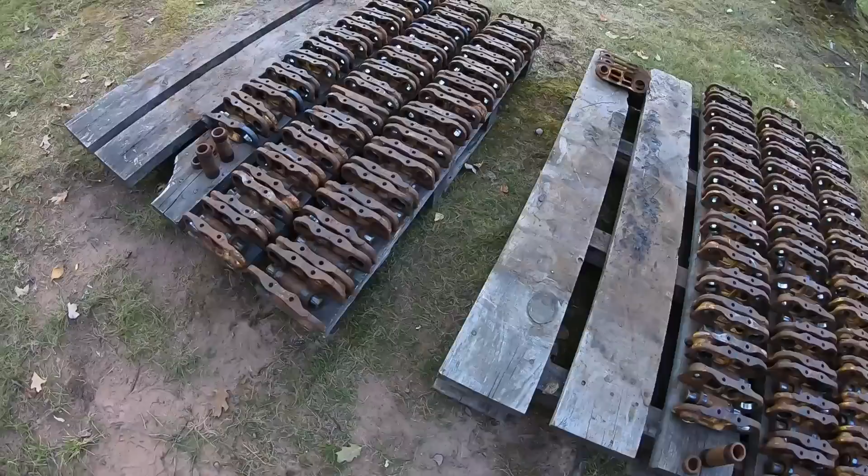That's right, we've got everything completely broken down for track links. And I have not gone through and assessed every one of these with a fine-tooth comb yet. I've got a small pile of links right there that are all bad, and another small pile of some links, a couple of nasty master pins, and some roached bushings, and that's another bad pile right there. But we need to go through all the rest of these and make sure we've got everything in good condition before we even start trying to put any of those back together.

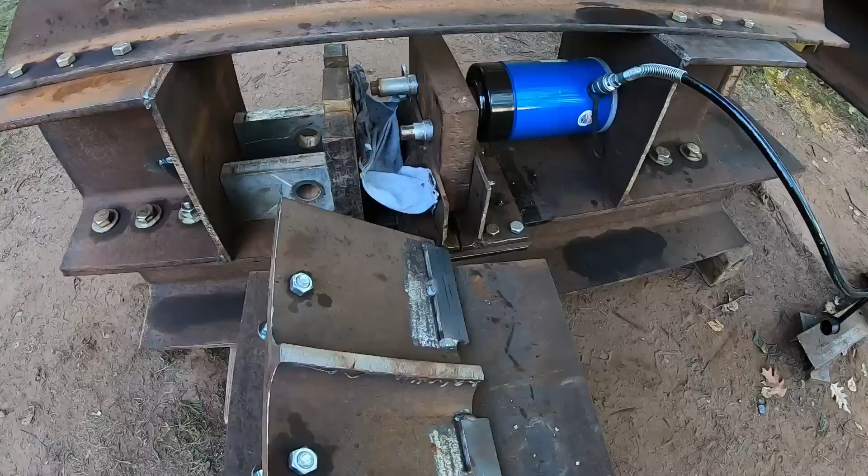And I wanted to give you an update on my thoughts regarding the track press. I've got roughly, I would say, 175, 180 cycles on it now, under pressure. And, well, I ended up using this track press for the majority of the disassembly of the remaining pins and bushings out of those single links because the 30-ton press frame pressed the pins just fine, but I could not get it to press the bushings.

And one interesting thing I found was all of the pins in the links all pressed easier than the bushings. The pins routinely let go around 20 tons and then drifted out from 12 to 15 after that. The bushings mostly wanted to let go at 30, some 35 tons, and it took about 20 tons to drift them the rest of the way out of their bores. So the bushings definitely press harder than the pins, and the 30-ton ram was at its limit even trying to move a bushing.

So what I ended up doing was taking all of those links that still had an individual link with a pin and a bushing left in it, I flipped them around and then just set them back in here and used the 50-ton ram to finish pressing those the rest of the way apart.

So like I said before, the reason why I wanted to try and press the remaining pins and bushings one at a time in the 30-ton press was to keep the cycles off the track press machine because, yeah, it's got a lot of power, a lot of strength, but I don't know what its lifespan is going to be. So I was trying to conserve that power and strength for when I really needed it for disengaging that first initial link and then pressing that link back on to reform a cohesive chain of track. But I had to fall back on the main press because the smaller 30-ton just wouldn't do it.

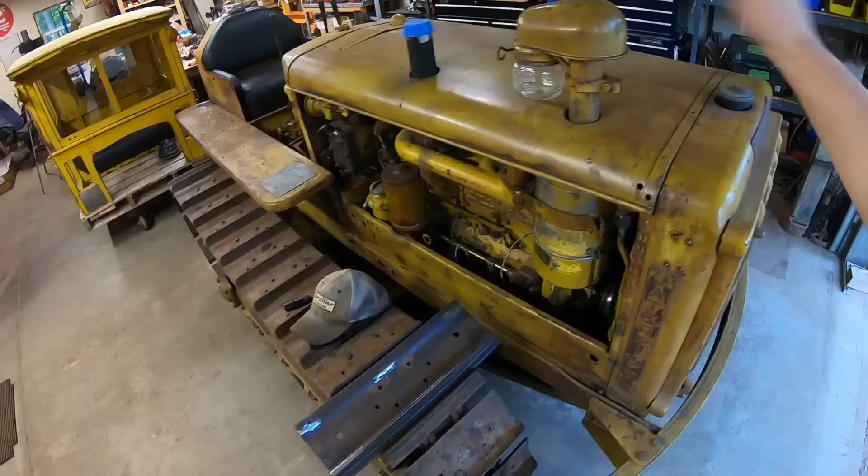All right, so another common question that came up in the comment section under the last episode was, why am I going through all the trouble of pressing out pins and bushings to turn them 180 degrees to renew the wear surfaces and press them back in when I could potentially just take the chain from one side, flip it around, put it on the other side, do the same with the one from that side. You would reverse the direction of the chains. You would also reverse the thrust that is being applied to the pins and the bushings, and that way you wouldn't have to take them out and turn them 180 and you'd be accomplishing the same thing, right?

Well, I made an episode talking about this very thing several months ago, and that little link that just popped up somewhere on your screen, if you haven't already watched that episode, I highly suggest you go back and look at it because it explains in depth the geometry of track links on crawler tractors and how it is very important to only run them in the proper orientation or the proper direction.

You can fit a track chain on in reverse, but it throws the geometry off. It is going to interfere with the sprocket picking up a bushing. That bushing is then going to have to rotate under pressure on the sprocket teeth as it picks it up and brings it around.

It's not a good idea at all to reverse track chains. That's why it's been industry standard maintenance routine to just press track pins out and press bushings out when they've reached a certain amount of wear, turn them 180 in the links, press them back in, because reversing those links is a very bad idea.

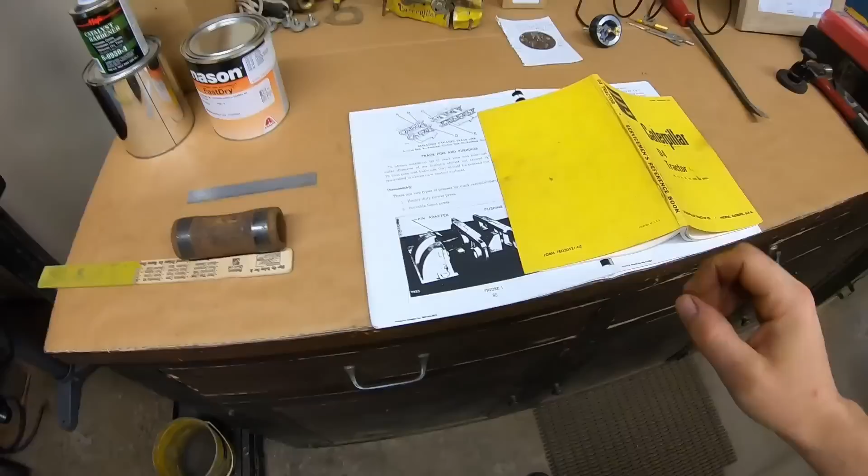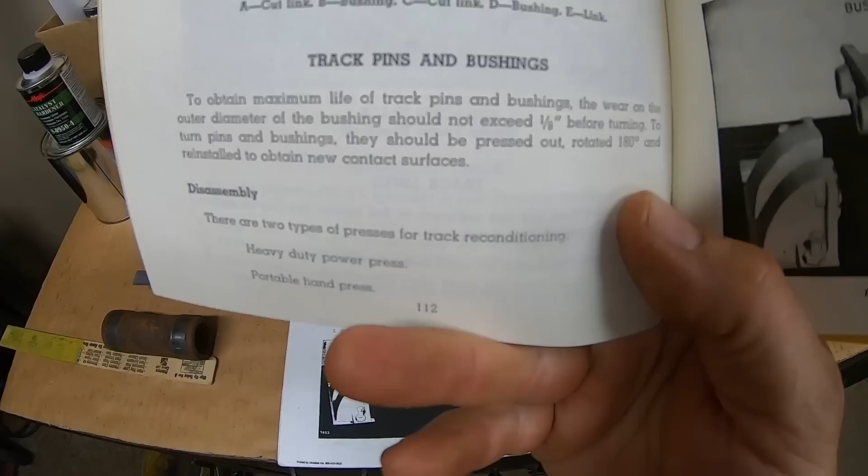Another question was, is this some kind of farmer hack or just something we're doing, like a backwoods bush engineering kind of thing to extend track life? No, this has actually been in practice since they've been building these tractors. I'll refer you over to the service manuals. Here's the D2 manual, here's the D4 manual, but it states right here, to obtain maximum life of track pins and bushings, the wear on the outer diameter of the bushing should not exceed 1/8 of an inch before turning. To turn pins and bushings, they should be pressed out, rotated 180 degrees, and reinstalled to obtain new contact surfaces.

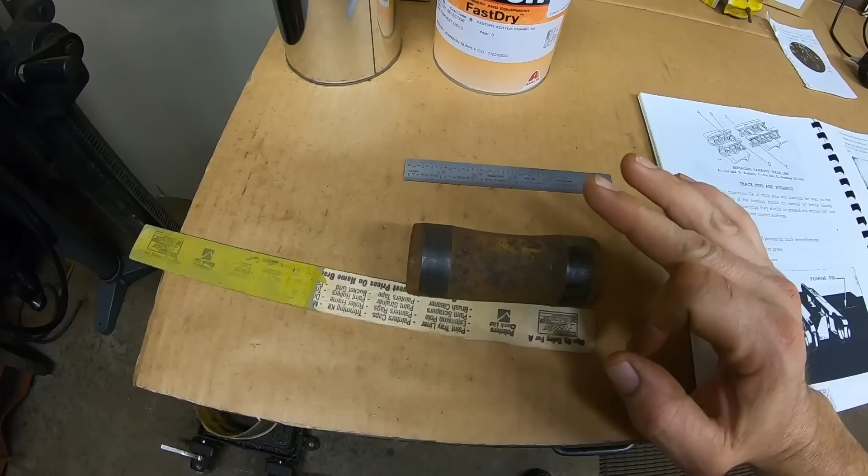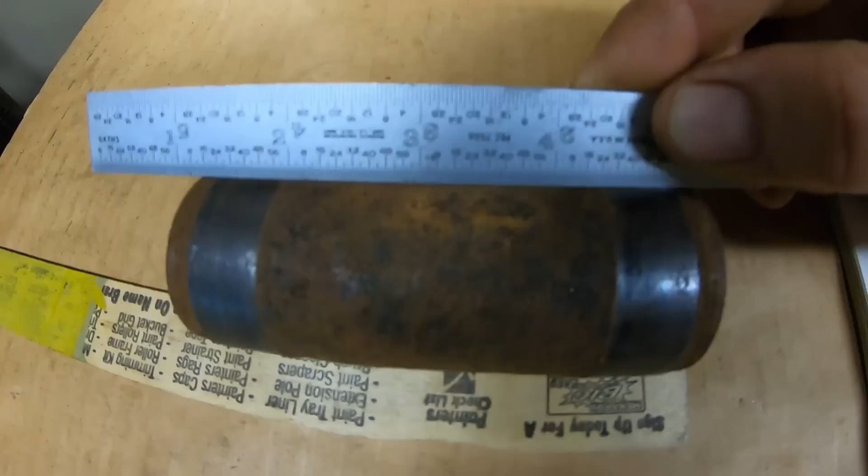That external wear they were talking about, I did not touch upon last time because the bushings from the tracks that I'm working on now do not really have external wear at all. This one does, and that's where that sprocket would always pick up the bushing. So if I put the straight edge up to it, I think you can see right there, we've got quite a gap. That's that external wear that they're talking about, and that's from the sprocket routinely just picking that up in the same spot all the time and pulling it on around.

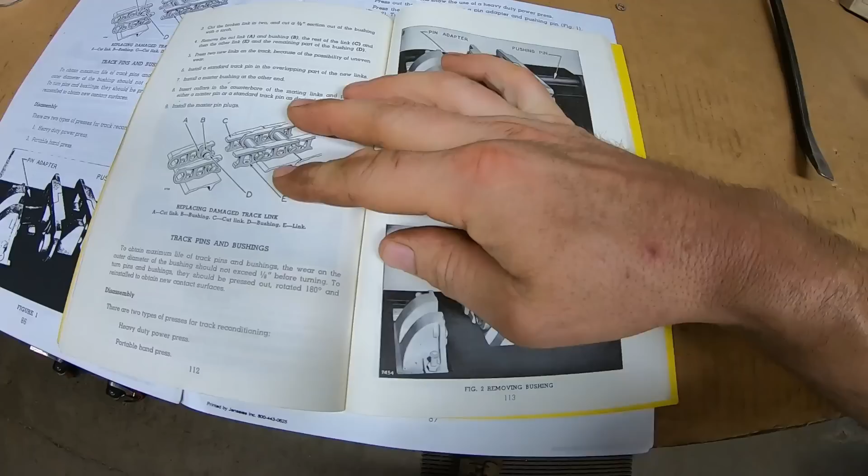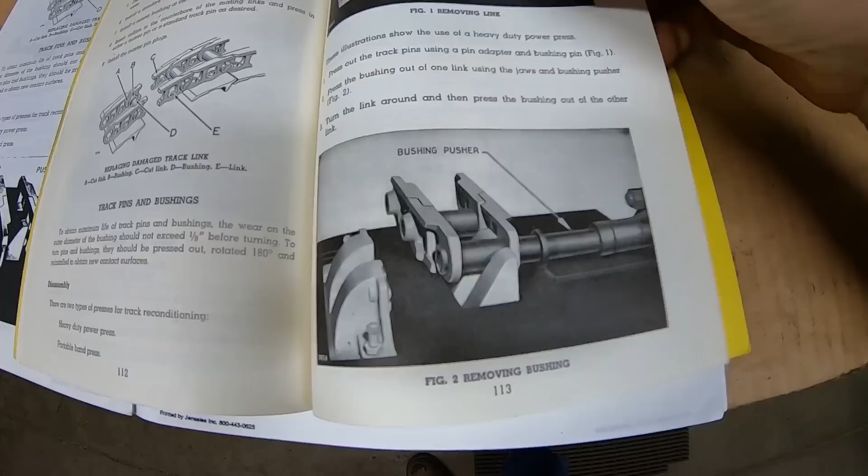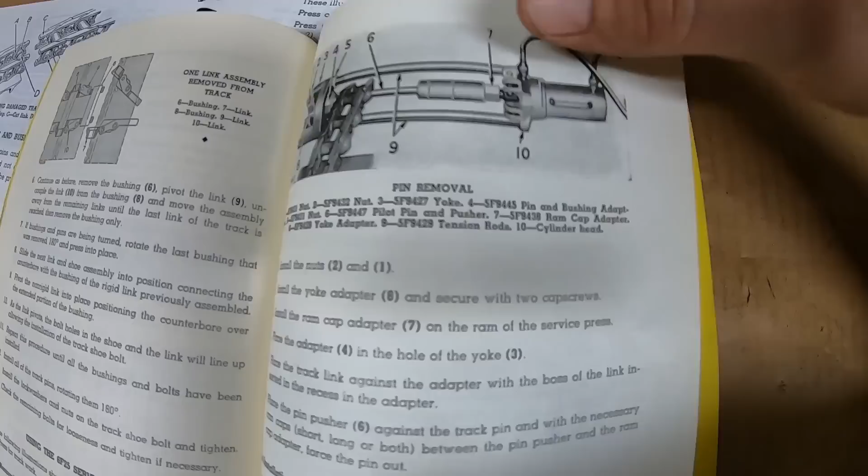Another common question was, what kind of setups did Caterpillar use to press the links apart and back together again? There are various illustrations in here. Basically, it's just another heavy-duty support braced track press with a large hydraulic cylinder and forcing rods that act upon the pins, the bushings, and they go through the whole procedure. But they also have the portable service press that you can see has lots of rods and adapters and yoke pieces, and these were the setups that would press a single pin or a single bushing in one stroke.

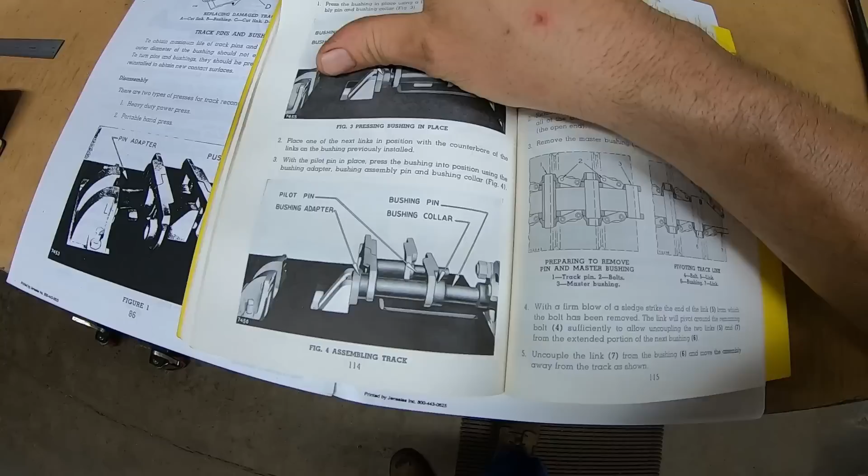So yeah, the track press I made is more like this heavier duty version here, where you can just press more like one link at a time. It's a shorter press stroke rather than, like I said before, having to press those pins and bushings all the way through.

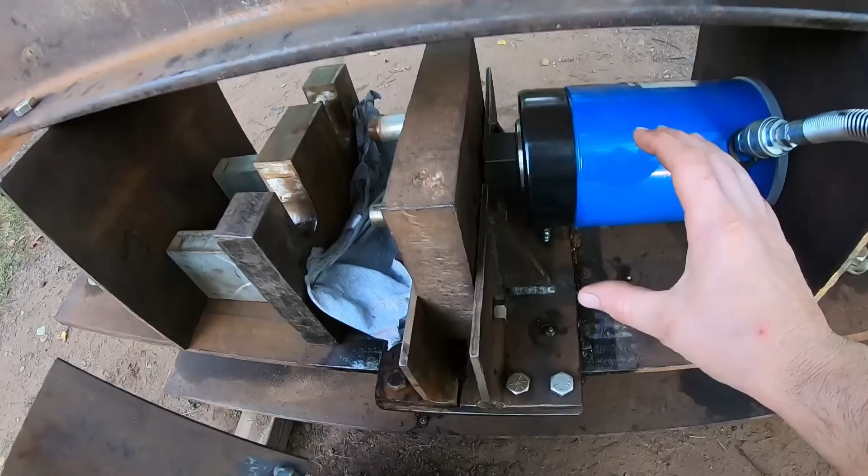Paul Womack had an excellent question that I really wanted to touch on. He said, with your 20/20 hindsight thinking cap on, if you had a time machine to go back and build this track press machine again, knowing what you know now, would you change anything about it? Yes, there are a couple things that I would change. The first aspect is my new minimum requirement for a cylinder for a track press to do D2 pins and bushings would be 60 ton. This 50 was at its limit for several of the really stuck links that I had.

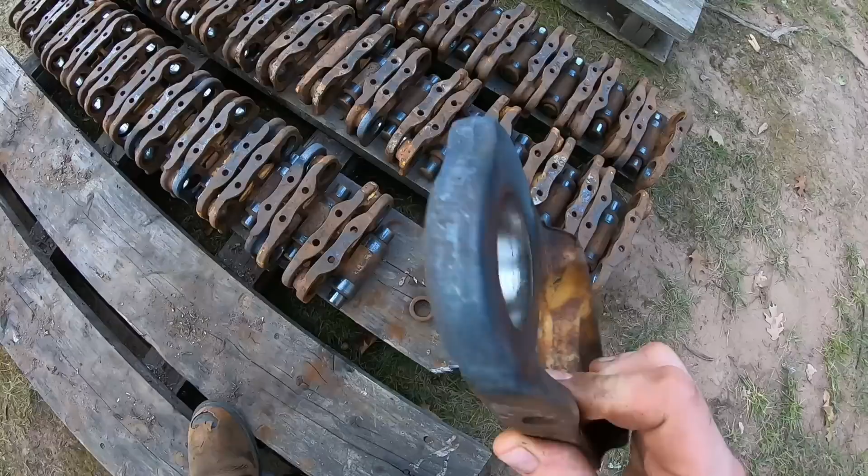There were several of them that I actually had to apply heat to get to move. And you can see, here's an example, where I had heat on that one and also around the pin bore. There were about 10 of those total that I had to resort to heat to initiate movement. And that was another thing that came up quite often beneath the 30-ton press rehab rebuild video. Why didn't you just try heat?

The problem with applying heat to tight tolerance press fit bores is if you apply too much of it, you will actually distort the bore and loosen that press fit, and you cannot afford to be loosening press fits on pins and bushings. They have to be extremely tight for a reason. If they are not extremely tight, they will start drifting out because they operate in a very severe, very adverse environment. And yeah, you want to retain that tight press fit.

One rule of thumb when you're dealing with press fit components is if you need to use heat almost every time, you don't have enough press power capability. So the ultimate goal is to be able to have the amount of pressure, the amount of strength to disengage those press fits and re-engage again every time at ambient temp without having to resort to heat.

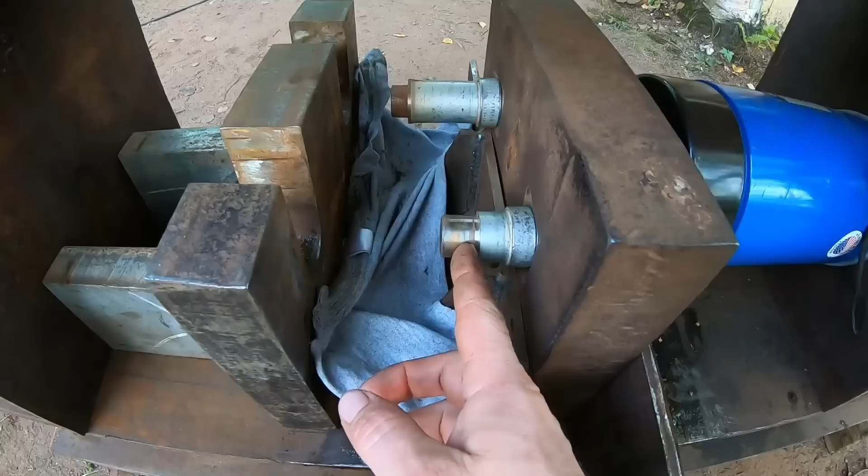So aside from deciding that if I had to do this next time, 60 tons would be my minimum cylinder spec, the only other kind of shortfall I had on this was my driver tools. Now, the pin driver actually held up pretty well. It would want to mushroom a little bit, but for the most part, it held in there.

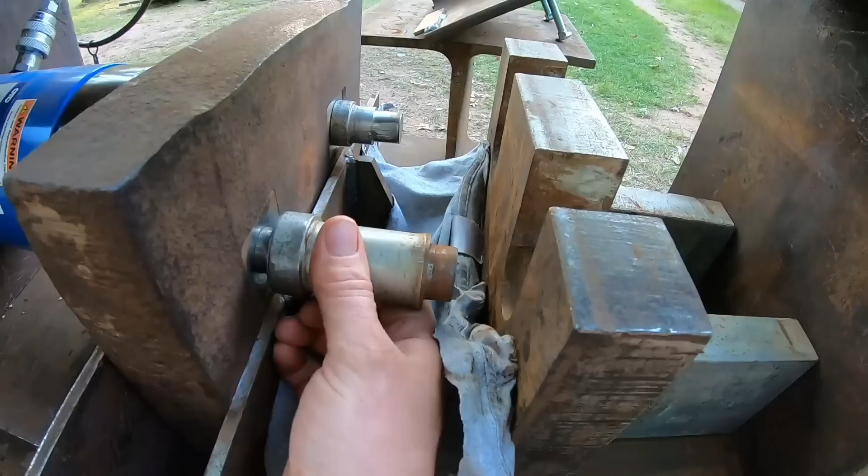But being that the track pins disengaged easier, like I just got done explaining, the bushing driver suffered some more abuse. I had a lot of mushrooming going on, and you can see where this has started to mushroom yet again. I had to redress these drivers 3 different times on the lathe. Not a huge deal, but it does mean that you have to take your press cylinder out a little bit further every time, because every time you dress these down, they get a tad shorter. I would like to have harder drivers for doing especially the bushing and the pin as well.

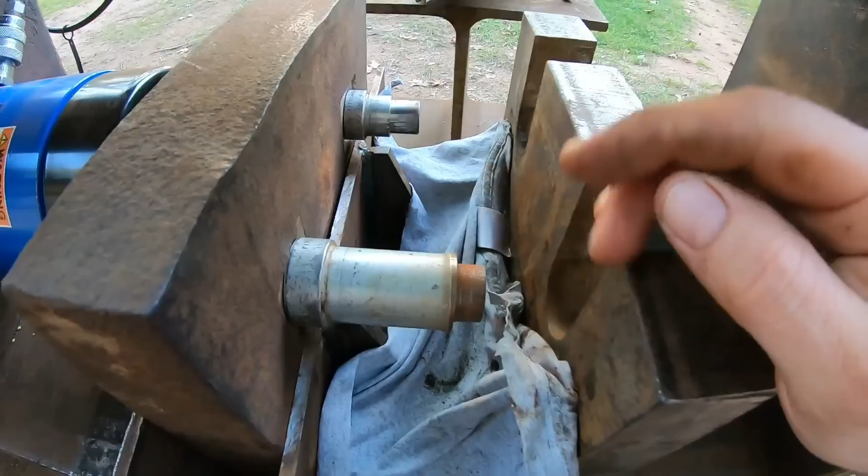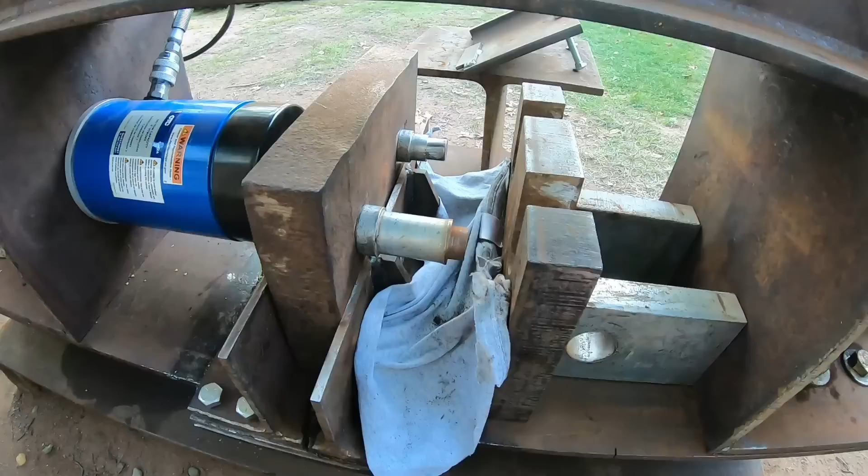And one very interesting thing to note from using the pressure gauge on the hand pump, I could tell when it was getting time to dress these drivers, because the bushing driver would always wear first, and as it mushrooms back, your shouldered surface creeps back a little bit more all the time, whereas the pin driver pretty much stayed consistent. If I would get a 1/16 of an inch mismatch from when the pin driver tightened up against the pin to when the bushing driver finally tightened up against the bushing, 1/16 difference there put enough of a side bind on the sliding portion of the table. It accounted for a full 10 tons difference in pressure required to disengage pins and bushings.

That was one really handy part about having that pressure gauge on the hand pump. You could just kind of watch that and know how your drivers, how your mandrels were doing for wear. Yeah, you wouldn't think that we're using so much just brute force here, that 1/16 of an inch difference between your two drivers could account for up to 10 tons difference in force. When both bushings were dressed, 40 tons would disengage almost every one. When the bushing driver needed to be redressed and we were having that mismatch, I could take it up to close to 50 tons every time to initiate movement. That's when I knew we had to do some work down here.

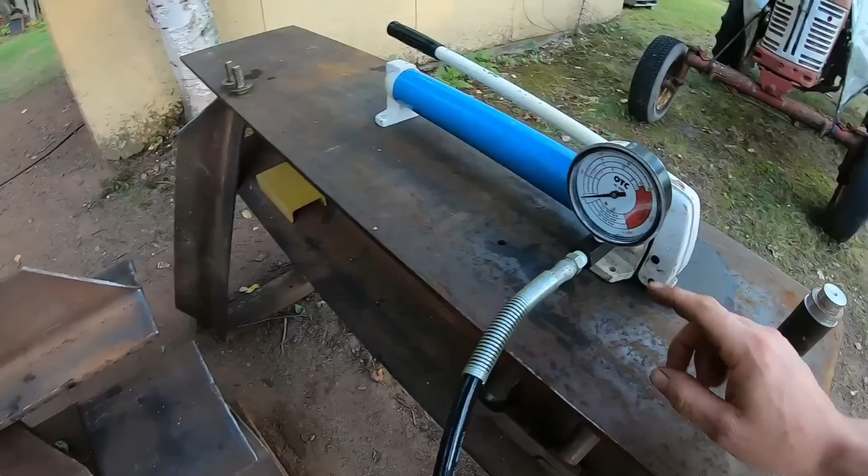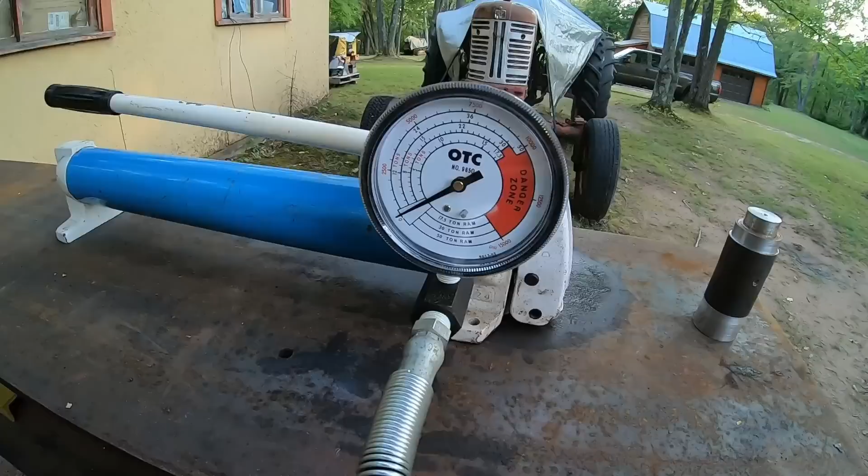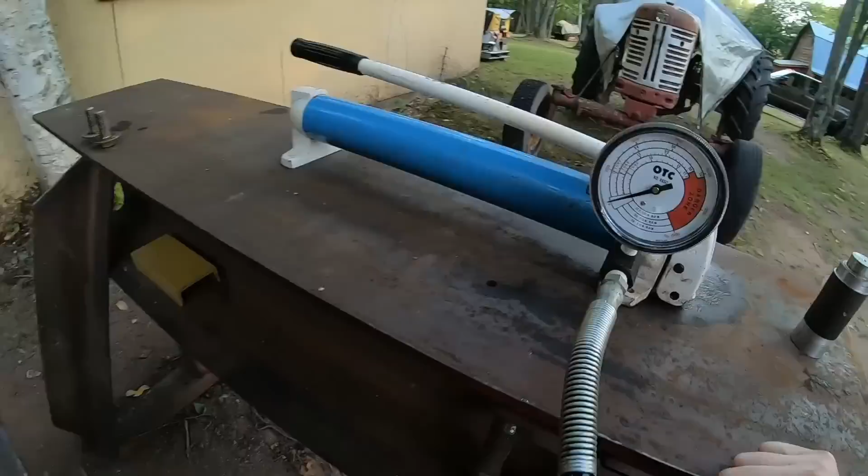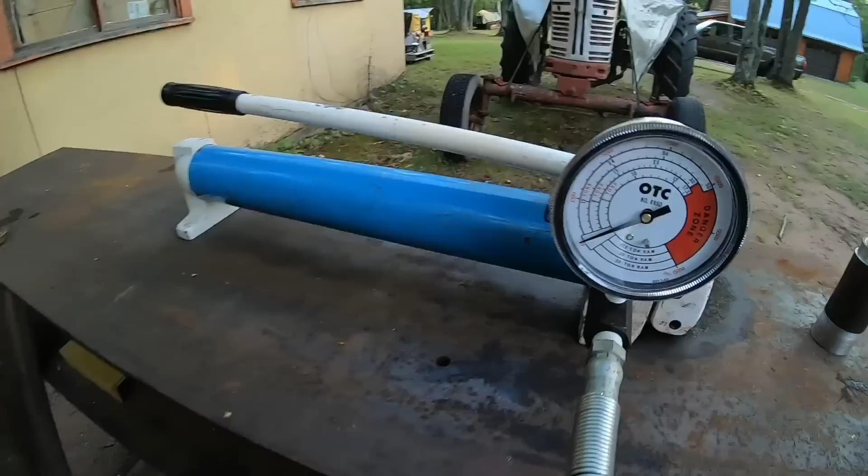Another rather common question was, could you do away with the hand pump and hook a tractor up to this thing and make it easier? You have to realize the pressures with which we're talking about. Granted, this is just a small looking hand pump. It can put out up to 10,000 PSI of pressure. So any of the old Farmalls, the old 350, the H, the Super M, they pretty much top out around 1,500 PSI output. On the 50-ton range, that would put us about 7 tons, okay? And we need 40 tons capacity under the best case scenarios to initiate movement, sometimes the full 50. Even the newer Kubota tractor tops out at about 2,500 PSI. That's only 12 tons. Hooking a tractor to the cylinder, any tractor we have on the place, would be completely ineffective.

Okay, just a couple of talking points left and I'll let you all go. A lot of people asked if it would help to soak these tracks in any kind of penetrating oil or diesel fuel or what have you to get them to press apart easier, and that answer is no. These press fits are so tight that not even rust creeps into that joint. Penetrating oil, diesel fuel, nothing is going to loosen the press fits. Now, if you had tracks that had very little internal pin and bushing wear and there was actually rust buildup inside of those areas, causing the links not to want to pivot on each other, then yes, soaking them can sometimes make a difference.

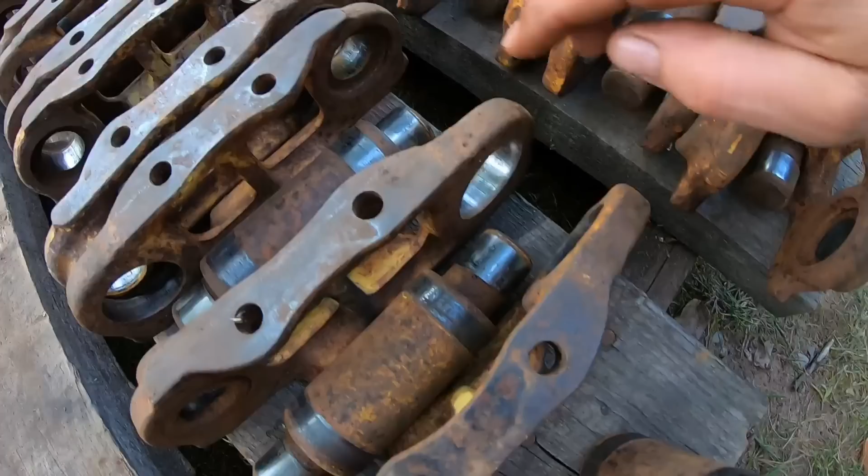You can see here, you look down, every one of these bores is shiny. Okay, everything that was tight, I should say. And you can see the shiny areas on the pins and the shiny areas on the bushings. Like I said, rust cannot even get into press fits that are that tight. And it wasn't just the fact that, yeah, we had a little bit of rust between the pin and the bushing when we were pressing those initial links off.

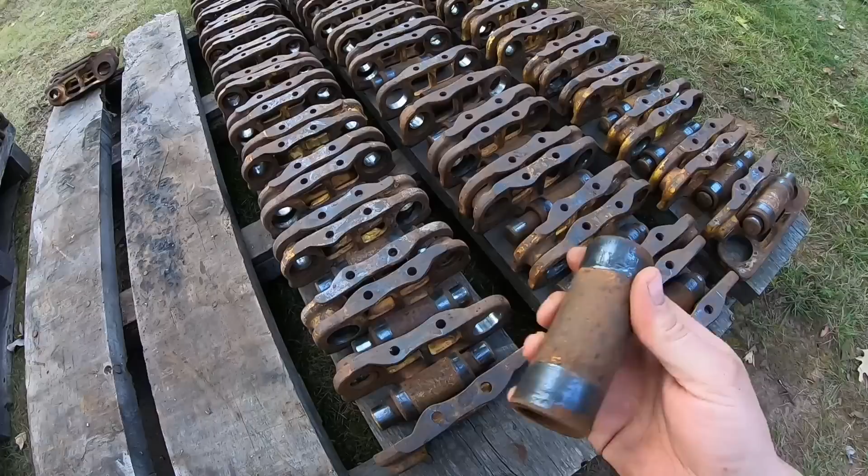Even after I had the pins and bushings disengaged from one another and we're taking them one at a time out of the remaining links, they still pressed just as hard. So the surface rust that was in here was not what was sticking us at all. But if you did have surface rust in there that caused them, like I said, not to even want to rotate within one another, and it was causing your links to stick and stay bound, bent, and everything else, then soaking them would help loosen some of that inside, but it's not going to do anything on the press fits.

Another interesting fact when it comes to soaking tracks: water works really well. I know several instances where people have taken tracks that had tight pins and bushings, but they had stuck links that didn't want to pivot, and they went out and threw them in the pond or in the swamp for a couple of months, just left them submerged. And water is what initiated those rust bonds. Water also can soften those same rust bonds.

And when you take them back out of the water, you want to get them freed up and then get all that old water purged out as soon as possible. Otherwise, they're just going to rust and stick again. But it's amazing how well water works for freeing up sticky track links.

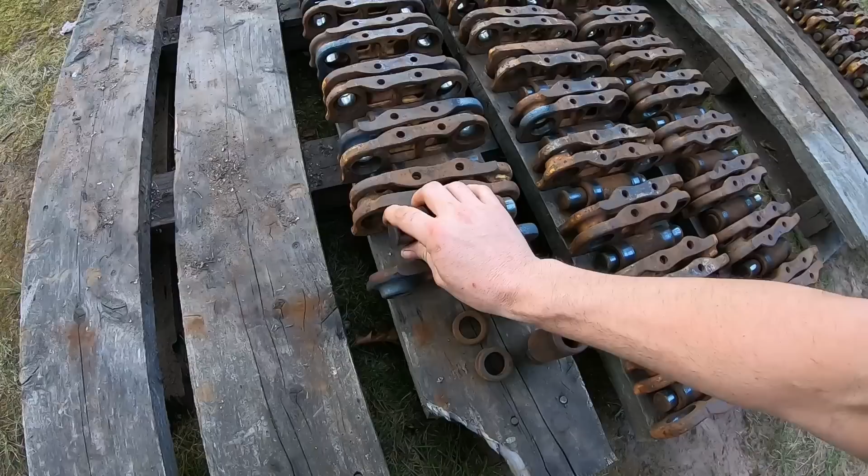The last common question was, when you put these back together, could you pack some high quality grease inside those bushings before pushing the pins back in? That's another theory that on the surface sounds like a good idea, but these are made to be dry running tracks. You do not want to put any type of oil, grease, lubricant, anything on any of these tracks. These pins and bushings are extremely hard. They're meant to wear against each other, metal on metal.

And if you put grease into those joints, all it's going to do is absorb grit, and that's going to create a grinding paste that is just going to further accelerate wear. They will actually wear less running dry. So it sounds like a pretty good plan and a good idea, but you definitely want to keep anything that's going to attract and stick dirt out of your tracks.

So that's pretty much the update on the track press. Honestly, I'm pretty happy with how it functions. I believe the press frame is built plenty well to cope with anything that 50-ton cylinder can put on it, but to actually put it into practice just to do D2 tracks, I would want probably a minimum 60-ton cylinder if I had to do it again.

That's another thing. I'm hoping not to ever have to do pin and bushing work again. It's not fun. I wanted to do it to these tracks, A, to figure out how to do it and see if I could do it, B, to keep all good Cat OEM tracks on 1113. Granted, I'm up to 4 sets of brand new aftermarket Italian VemaTrack track chains that'll fit D2 and D3. I could have used any one of those on 1113.

I wanted to do the pin and bushing turn because these are such good links, to keep all OEM Cat components on this tractor. So that was kind of the second reason why I wanted to go through all this and just do it. But I definitely wouldn't do this work for hire for anyone. It's too dirty, it's too time consuming, it's too hard on equipment, and it's too dangerous. And I would not want to have to do anything bigger than D2 tracks anyway. I'm not sure the tonnage it would take even for D4. I'm guessing 75 ton, maybe 80 if you're really going to do it right. So it's not easy work.